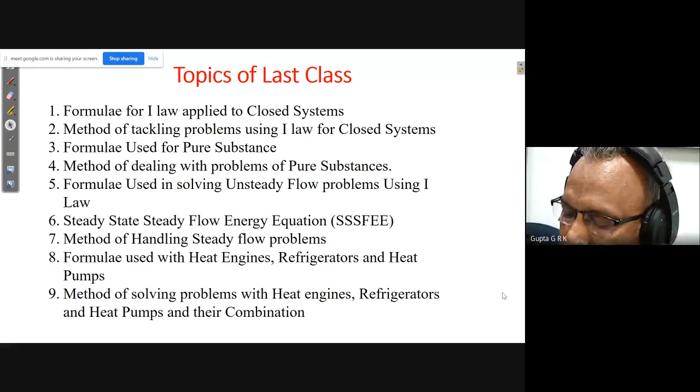So those things we discussed in the last class, and today I am going to do it on the board. We'll discuss today about thermodynamic cycles, which we also call air standard cycles.

All thermodynamics mainly deals with applications in power generation, where we use power cycles, and the other one is refrigeration. These are the main categories thermodynamics works with. Refrigeration will have refrigeration cycles, and heat pumps also use refrigeration cycles only. In power cycles, based on the working substance, we have gas cycles and vapor cycles. If it uses a single phase gas, then we have gas cycles, or two-phase cycles, where part of the processes will have liquid or vapor or a mixture of it. So there are two-phase cycles. Again here also we'll have air cycles and vapor cycles.

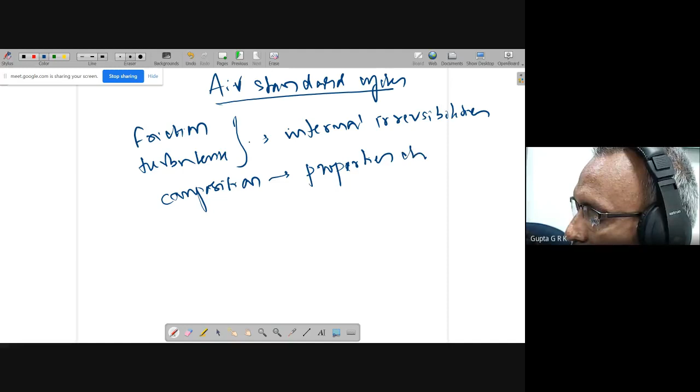So because of that, what are the difficulties? Normally friction or turbulence, which are called internal irreversibilities. And composition normally changes, right? Because the fuel is burnt in the air, so composition changes, its properties change. So it will become difficult. And another thing is like heat losses, there will usually be some heat losses also. All these things make the analysis difficult for the real cycles.

So for that we make some assumptions, and we call them assumptions for the air standard cycle. First we assume that the working fluid is air. And another thing, air is perfect gas. We assume it is perfect gas. Under the ranges of pressures and temperatures, we assume it behaves like perfect gas. Meaning Cp, Cv, R, molecular weight, all are constants. We assume these are constants.

And next, no chemical reactions. Actually there is chemical reaction, burning takes place, but I assume there are no chemical reactions, and the composition of air doesn't change.

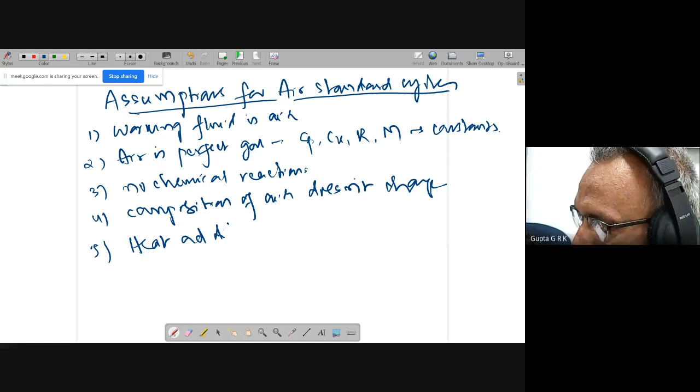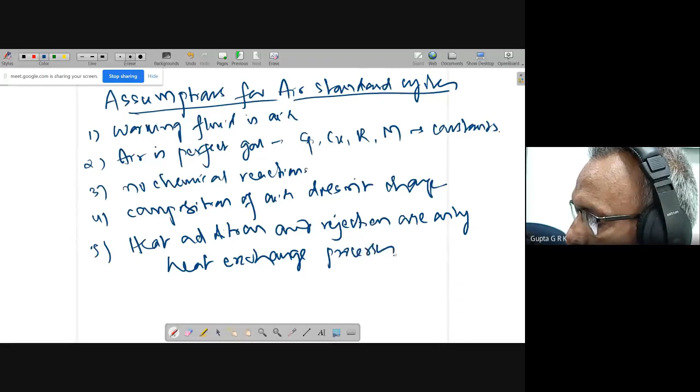So how does the heat addition take place then? So heat addition and the rejection are only heat exchange processes. That is, if I have a combustion chamber like this, where the fuel is there and the air comes here, its composition changes, right? So it is not assumed that this takes place. So we assume there is air going like this, and there will be heat addition through a high temperature reservoir.

Similarly, a heat rejection to a low temperature reservoir, to the atmosphere. So this is the way only heat transfer takes place, not by the burning. So its composition remains unchanged throughout the cycle. So we assume the cycle is a closed cycle. And so this is called an external combustion engine. We assume external combustion, meaning somewhere else the burning takes place, not in the fluid. Okay, this is one particular thing.

It is important to know about the difference between IC engine, internal combustion engine, and external combustion engine. It is not electronics and communication, it is external combustion engine. So here the burning takes place inside the fluid, right? So the composition of the fluid changes. So here it is not like that.

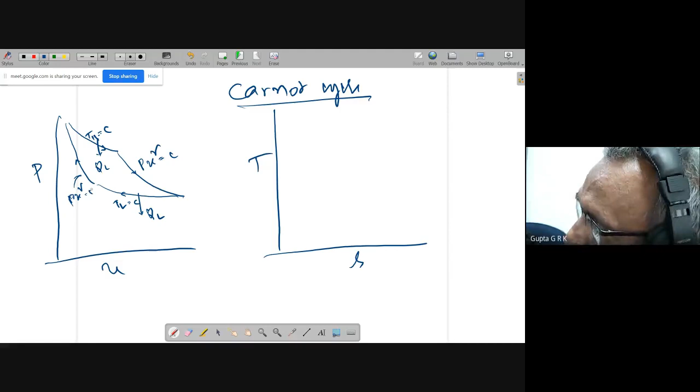This is a reversible isothermal process. Here heat addition takes place and here heat rejection takes place. This is a clockwise cycle, you have to put the cycle direction also. This curve is PV^gamma equal to constant, and this is also PV^gamma equal to constant. So two reversible isothermals and two reversible isentropics. In the TS diagram it becomes very simple, it comes like this.

This is TH equal to constant, this is TL equal to constant. This is point 1, this is 2, this is 3, this is 4. So this is isothermal compression then isentropic compression, and this is isothermal expansion then adiabatic expansion. This is the way the four processes take place.

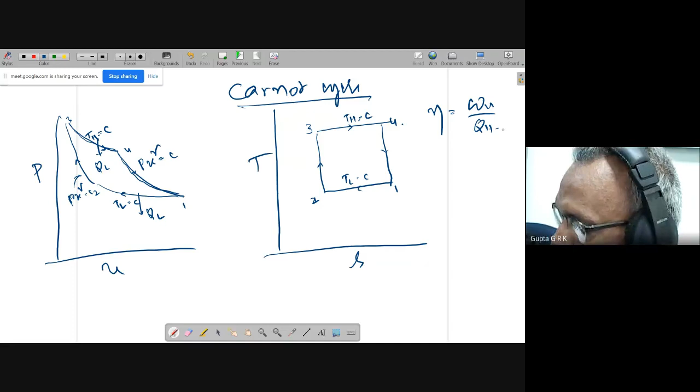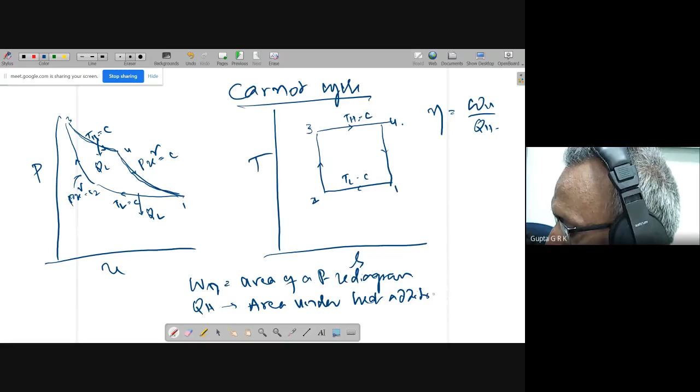If you want to find out the heat transfer, always remember efficiency equals Wn by QH. Wn is the area of the PV diagram. What is QH? It's the area under heat addition in the TS diagram. So this is area under the PV diagram, or area under the TS diagram.

This area gives me Wnet. Here this is heat addition, this is heat rejection. So area under the heat addition curve, the whole thing, this is QH. This gives me Wn, QH, and also efficiency.

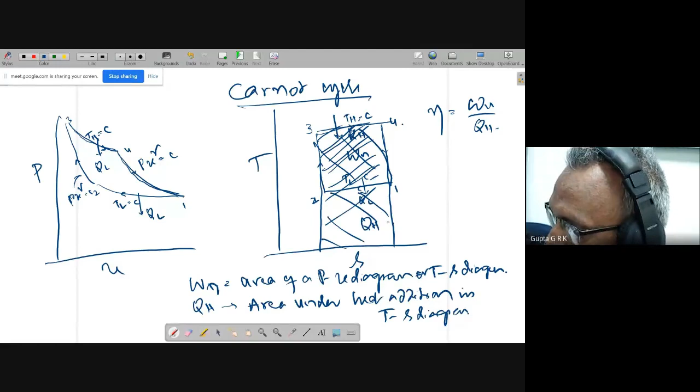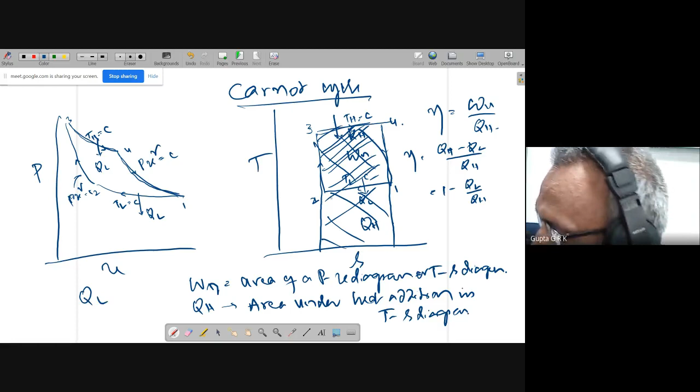If I want to get the expression for efficiency, I'll do it in a simple way. Efficiency equals QH minus QL by QH, that is equal to 1 minus QL by QH. QL is the area under 1-2. Here temperature is constant, TL into S1 minus S2, this is the area under 1-2.

And QH, if you take the rectangle below 3-4, temperature TH into S4 minus S3. So if I write this, it's 1 minus TL into S1 minus S2, by TH into S4 minus S3. S1 minus S2 and S4 minus S3 have the same length, so this cancels, giving 1 minus TL by TH, the Carnot efficiency.

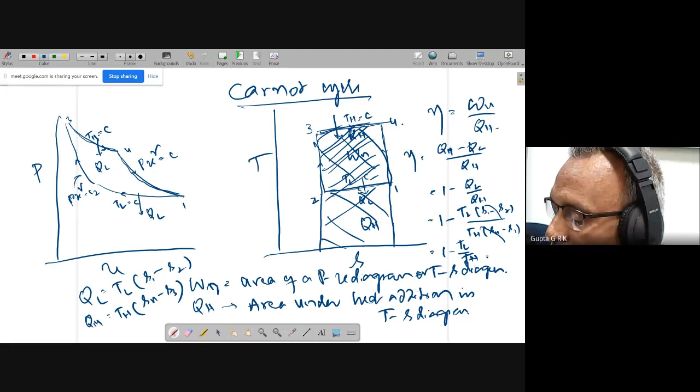You can use the other way also, the way I did previously when solving the Carnot cycle using volume ratios, temperature ratios, and work done. Or simply using entropy, I can get the efficiency like this. So this is the way we get the Carnot efficiency.

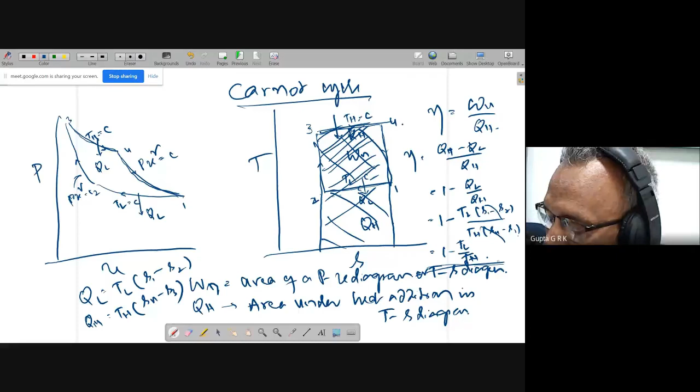Is it okay? Right, thank you. So we'll go to the next one.

So we go to the Otto cycle or diesel cycle. These are actually reciprocating engines. These reciprocating things we have already discussed. We will have a cylinder and a piston moving to and fro.

If this is the piston, there will be some clearance here, this is called the clearance volume, VC. It can go up to some distance, this distance is called VS, the stroke volume or swept volume. The total volume from top to bottom is called the cylinder volume.

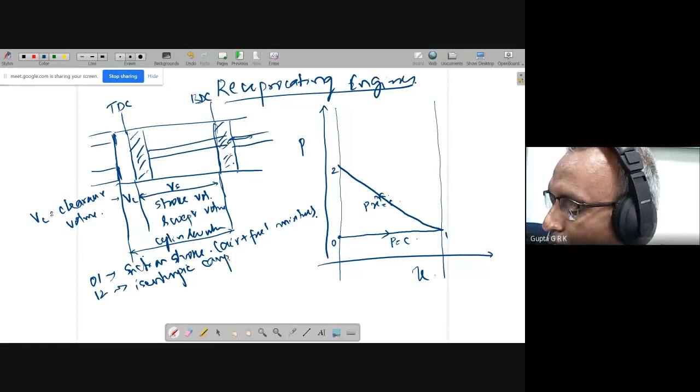So this is 2. So 1 to 2 is isentropic compression. Here both air and fuel mixture is sucked and compressed. When it comes to the top dead center, there will be a spark plug, and there will be burning. There will be a sudden rise in pressure because the mixture is ready for combustion.

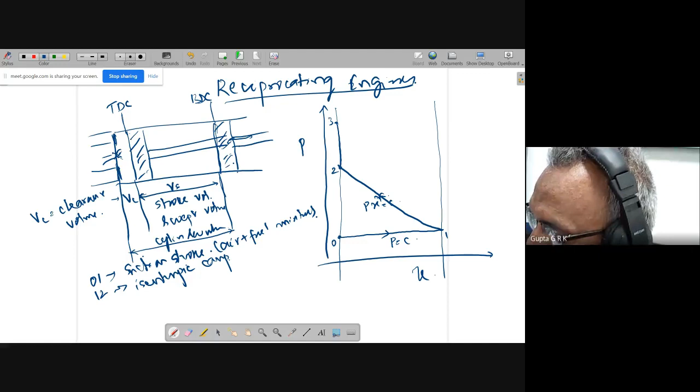It is at high pressure and temperature. So there will be a sudden rise in pressure and temperature, and heat addition here. So 2 to 3 is constant volume heat addition, and then there will be a power stroke or expansion stroke.

It goes like this, this is 4. This is also isentropic, PV power gamma equal to constant. So 3 to 4 is power or expansion stroke. At 4, here during expansion stroke also both valves are closed.

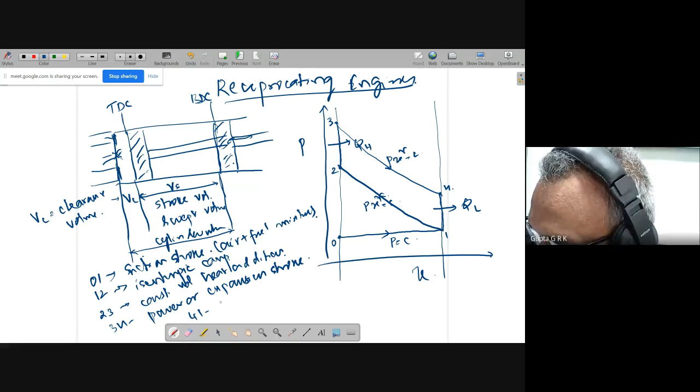So when it starts returning, before starting, because there will be some pressure inside, the exhaust valve opens. At 4, exhaust valve opens because high pressure is inside. Completely all hot gases will go out. This is called heat release, 4 to 1, this is called heat release.

Heat release. So all gases are over, now it can go forward. And when it is going forward, whatever gases are still in the cylinder will be pushed off. This is called the exhaust stroke, it just retraces, so 1 to 0, this is called the exhaust stroke.

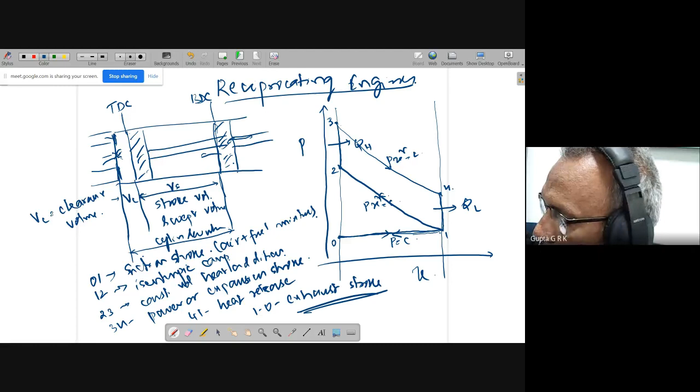This is the way the cycle completes. Again it starts from 0 to 1, it sucks, then compresses, then combustion, then power stroke, and release, and exhaust stroke. So you should not think that 1, 2, 3, 4 are the 4 strokes. No, when it is going from top dead center to bottom dead center, that is 1 stroke, bottom dead center to top dead center is another stroke. Like that, 4 strokes for 2 revolutions.

So this is 0 to 1 suction stroke, 1 to 2 compression stroke, 2 to 3 heat addition at constant volume, 3 to 4 expansion stroke or power stroke, again isentropic, and 4 to 1 it is heat release. Piston is not moving, piston is there only, we opened the exhaust valve. So this is exhaust valve opening, here 0 is inlet valve opens, and here both valves are closed, inlet valve closed, exhaust valve closed.

So this is the way the whole cycle takes place. Is the cycle okay? Yes, sir. Okay, so we will see the thermodynamics part of it.

So I have to draw this again, both PV and TS diagrams. So actually, when you draw it, normally in many books this line will not be drawn because there is no area. It just goes like this and comes like this, positive and negative area cancel out, so there is no area included, zero area. That's why many times it will not be drawn. And this is QH, and this is QL.

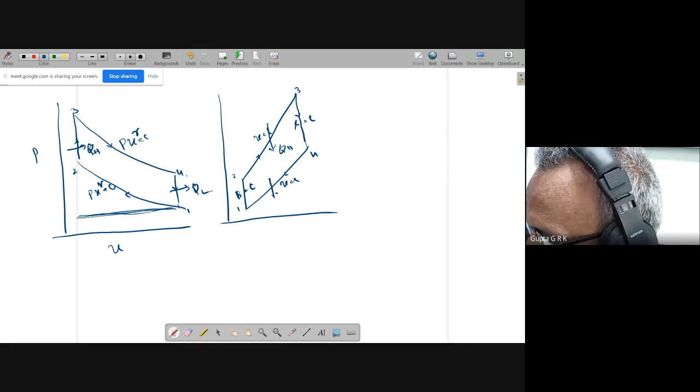So heat addition is here, QH, and heat rejection is here, QL. This is the way both cycles will be, this is T. When you draw the figures, you have to show everything. For PV, you have to show both axes, and put the arrows. Draw the cycle and show the arrows in clockwise direction, put the numbers properly, and show each process, heat addition, heat rejection, everything, so that it completes the cycle.

So if I want the efficiency, efficiency is equal to 1 minus QL by QH. What is QL? QL is a constant volume process. If I take delta Q equal to du plus delta W, delta W is 0. So here Q41 is equal to CV into T4 minus T1, because du is CV dt, CV into T4 minus T1. So I will write CV into T4 minus T1.

When you come to QH, that is 2 to 3. Again it is constant volume, delta W is 0. So Q23 is equal to CV into T3 minus T2. CV goes off, so I will get the expression like this.

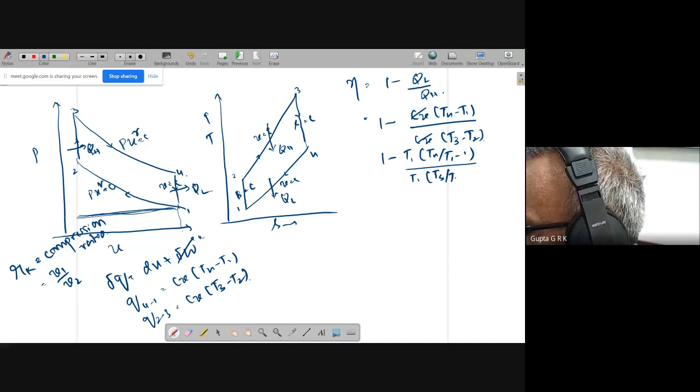I want to express this in terms of RK. For convenience, for all the cycles I follow this particular procedure. I take T1 common here: 1 minus T1 into T4 by T1, minus 1 by T1 into T3 by T1, minus T2 by T1. So what is each?

If I take T2 by T1, since this is an isentropic process, it is equal to V1 by V2 to the power of gamma minus 1, or Rk to the power of gamma minus 1. Now come to T3 by T2.

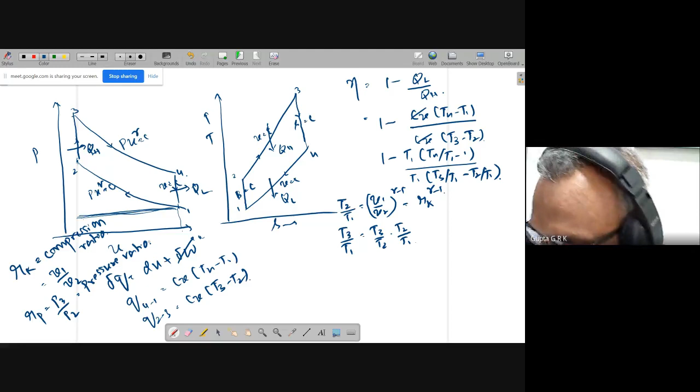T3 by T1 is T3 by T2 into T2 by T1. T3 by T2, going from low pressure to high pressure for a constant volume process, I can take as pressure ratio, Rp is equal to T3 by T2, which is pressure ratio. So P3 by P2, because for a constant volume process, P3 by P2 is T3 by T2. So I can write this as Rp into T2 by T1, which I already know is Rk to the power of gamma minus 1.

Then coming to T4 by T1, I will write it as T4 by T3 into T3 by T1. V1 by V2 is also equal to V4 by V3, because V1 equal to V4 and V2 equal to V3. So T4 by T3, since 3,4 is an isentropic relation, is V3 by V4 to the power of gamma minus 1, into T3 by T1. And V3 by V4 is again 1 by Rk to the power of gamma minus 1, and T3 by T1 is this, V4 by V3, here V3 by V4.

This is 1 by Rk to the power of gamma minus 1, into T3 by T1, which is Rp, Rk to the power of gamma minus 1. So Rk power gamma minus 1 cancels with Rk power gamma minus 1, and this will be Rp only. This is the way we get it.

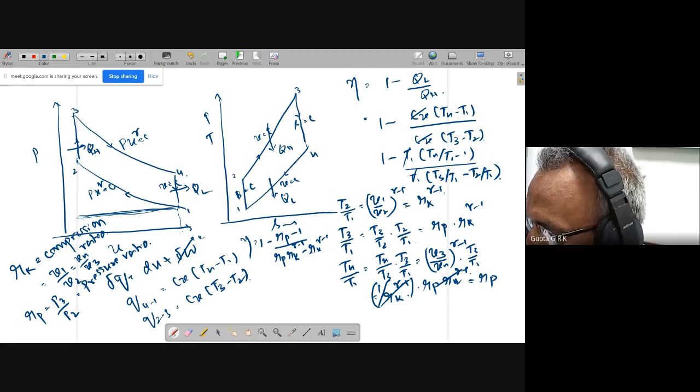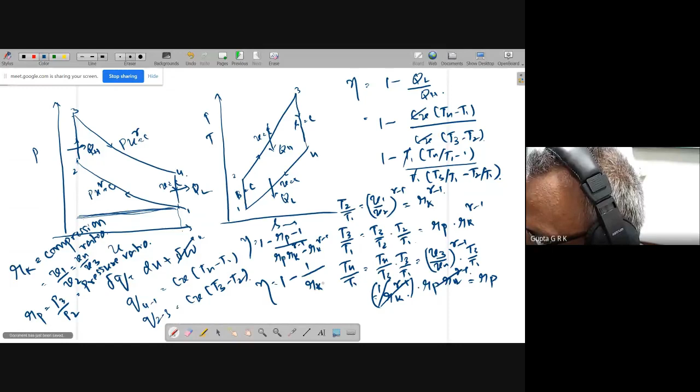In the denominator, if I take Rk power gamma minus 1 common, I will get Rp minus 1, and Rp minus 1, Rp minus 1 cancels off. So I will get 1 minus 1 by Rk to the power of gamma minus 1. This is how I get the expression. If you remember the Brayton cycle, I will get 1 minus 1 by R to the power of gamma minus 1 by gamma, where that R is pressure ratio.

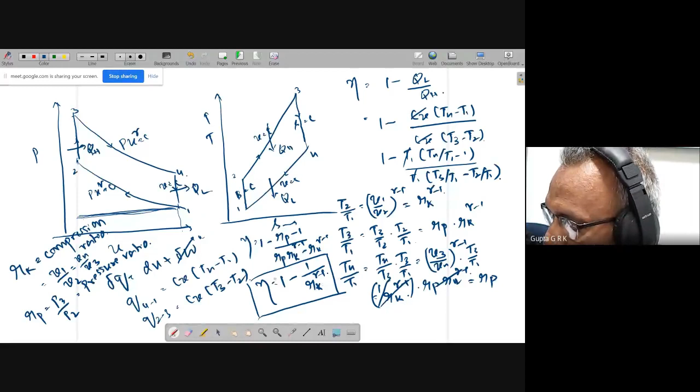Here this R is compression ratio, Rk is compression ratio. This is the way I get eta. So eta is equal to 1 minus 1 by Rk to the power of gamma minus 1. This means it is a function of Rk and gamma.

So if I draw the variation of efficiency with Rk, when Rk is equal to 1, efficiency will become 0. As Rk increases, this denominator will increase, and 1 by this will decrease, so 1 minus this will increase. So eta increases with Rk. As Rk increases, efficiency increases. So it comes like this.

It is also a function of gamma. If you calculate it for different values of gamma, you'll get something like this. As gamma increases, I'll get different lines like this. Suppose gamma equal to 1.2, gamma equal to 1.3, gamma equal to 1.4, gamma equal to 1.66. Gamma equal to 1.3 is CO2, gamma equal to 1.2 is like alcohol or ethane, gamma equal to 1.4 is air, and gamma equal to 1.66 is helium. So for different fluids of different gamma, as gamma increases, it is found that efficiency increases. This is the way we analyze this cycle.

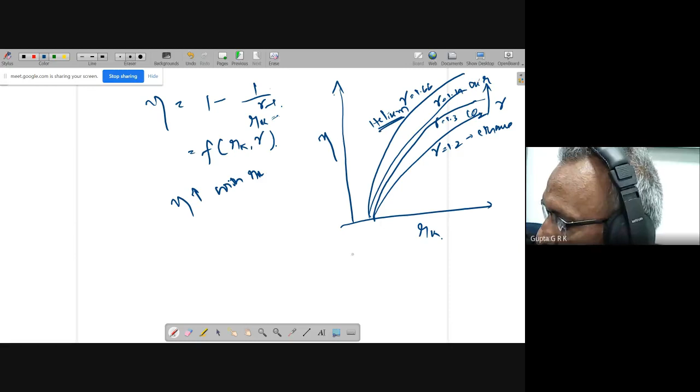I told you efficiency increases as Rk increases, right? So I want to have high compression ratios. But the problem is when I have a high compression ratio, as it is moving forward, because a mixture is getting compressed, two things may happen. One is, if the mixture temperature during compression becomes very high due to a large compression ratio...

The temperatures will be very high, and before giving the spark, the burning may take place before completion of the compression stroke. So if suppose it burns here itself, it cannot go to the end — it pushes it back, and I lose all the power. So this is one problem that may happen.

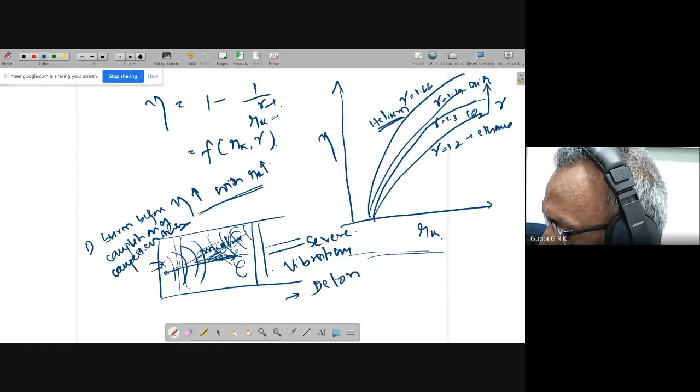Another thing is, after giving the spark, when it is going back, the flame front will be moving like this. Because of high temperature, there may be another burning here where the flame front comes and they interact, and there will be severe vibrations and a lot of noise. This is called detonation, sometimes also called knocking.

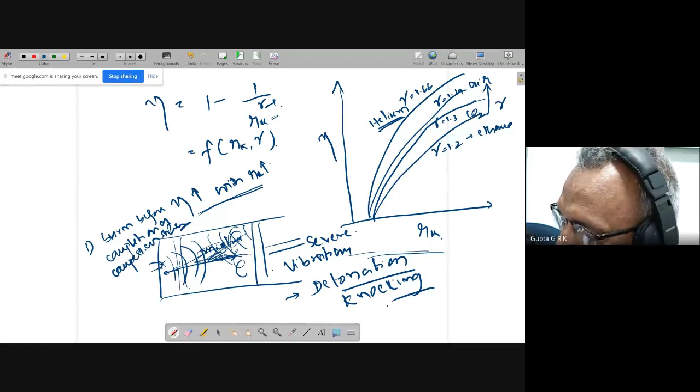So knocking or detonation takes place because of high compression ratios. Because I want to increase efficiency, I cannot just increase the compression ratio as much as I want — it is restricted by detonation and knocking.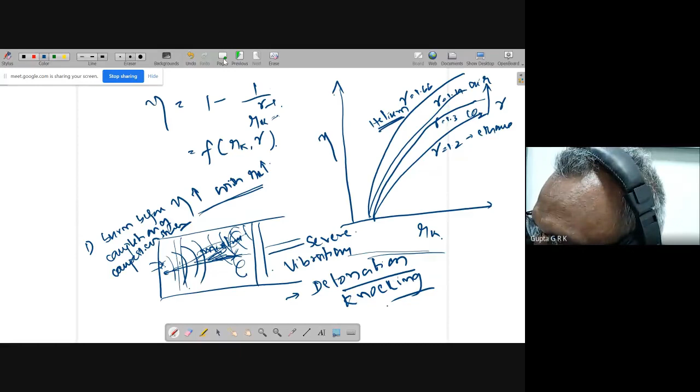So people used to add what is called tetraethyl lead to the petrol, which increases the auto ignition temperature — that is, it can only burn at high temperature. So it can increase the compression ratio some more so that it won't burn by itself. This is called auto ignition: burning by itself without giving a spark. If auto ignition temperature is high, the probability of knocking is less.

But later it was found that this lead in the petrol burns and comes out as lead oxides, which harms the environment and humans, because it is highly toxic and creates large pollution. That's why nowadays people have restricted using lead, and we have to use what is called unleaded petrol. In petrol pumps, you will now find unleaded petrol available. So we have to use unleaded petrol.

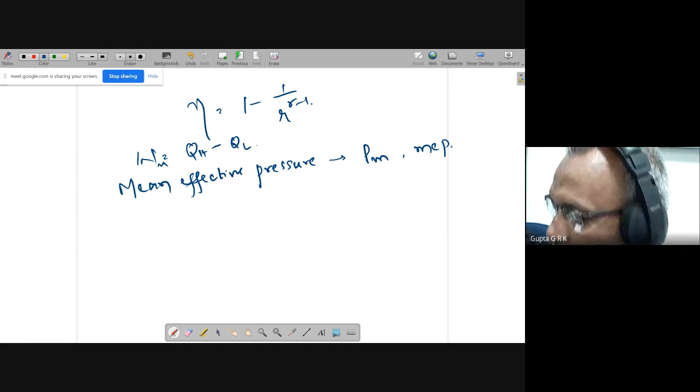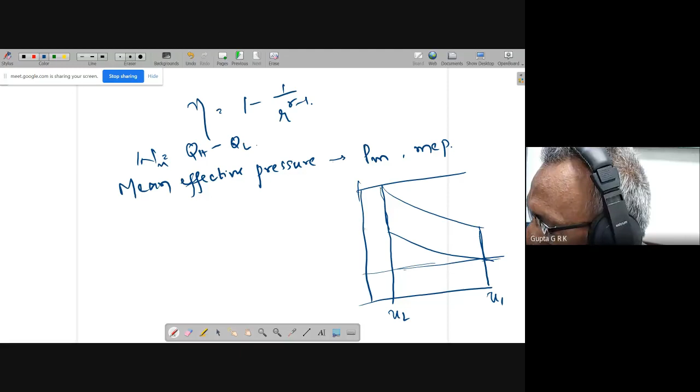We call it PM or MEP. Mean effective pressure means, suppose if I have a cycle working like this, this is the minimum pressure and this is the maximum pressure in which it is working, and this is V1 minus V2, this is V1, and this is V2. So there is a mean pressure here, such that this area is equal to the cycle area.

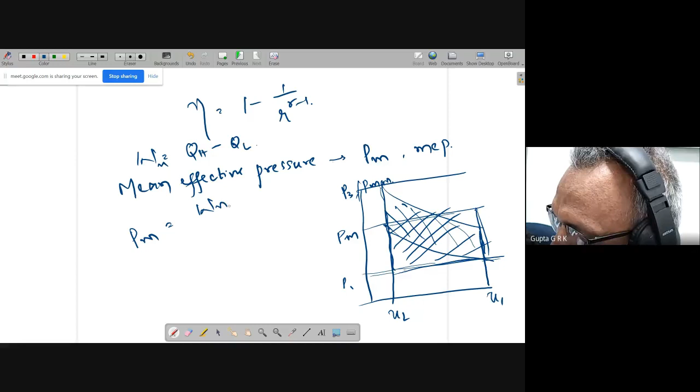That area should be equal to W net, the net work. So that pressure is called PM. This is P1 and this is P3 or P max, called the maximum pressure, P1 is the minimum pressure, and this is the mean pressure. So mean effective pressure PM is equal to W net by V1 minus V2. The area equals PM into V1 minus V2, which is W net, so mean effective pressure is W net by V1 minus V2.

Okay, this is the way the mean effective pressure is defined. So if you want to solve a problem... yes, go back to the previous one. Tell me.

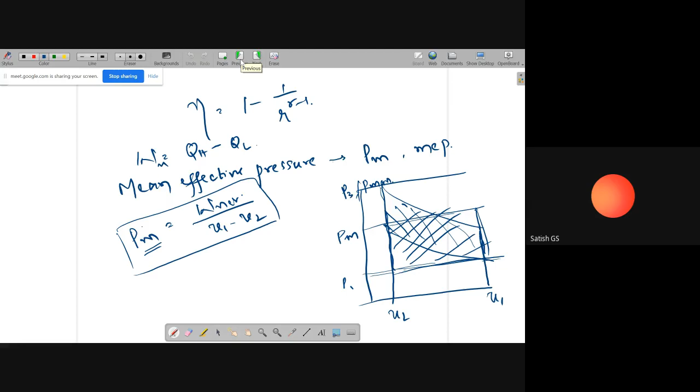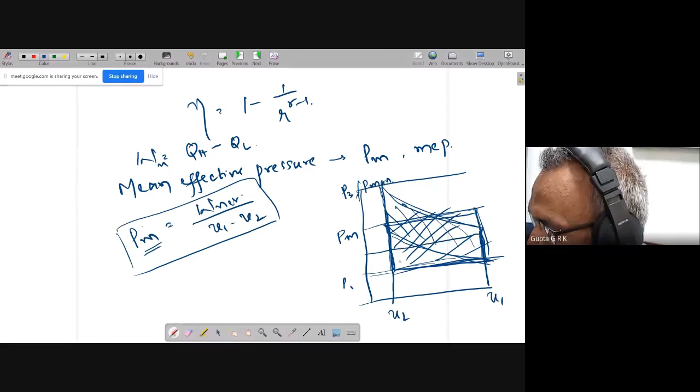Sir, PM equal to P1 plus... No, this area, it is actually this area. This is W net, right? Cycle area, this should be equal to this area. So if this area is equal to... sorry, this is P1 plus W. Actually, maybe it may not be like that. I think maybe here, above this. Okay, maybe this is PM.

It's not average of that or anything. Mean effective pressure means the average pressure that is acting on the cylinder to give the same work.

I think it's okay, previous one: PM into V1 minus V2. This area, okay, so this is PM. This area should be equal to W net. So V1 minus V2 is same, and this height of the rectangle is the mean effective pressure.

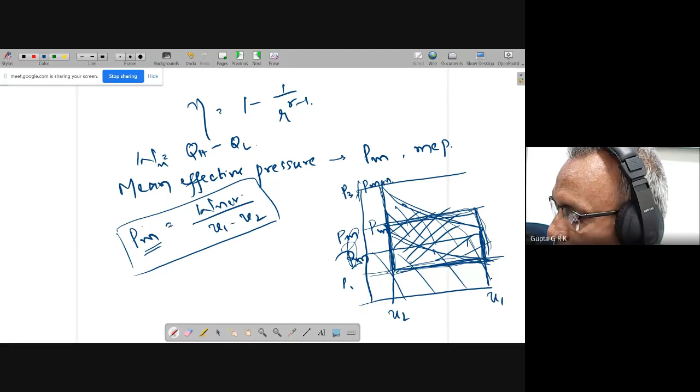It is only this height. This height is PM, okay, not on the axis. Not on the axis. Okay, this difference is PM, mean effective pressure. Is it okay?

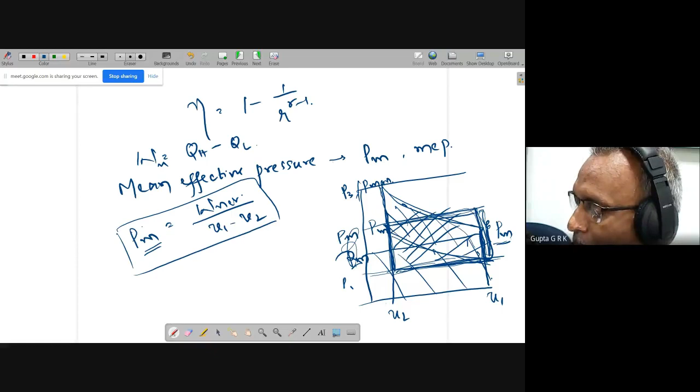Yes sir. So this area of the Otto cycle is replaced by a rectangle with the same V1 minus V2 width. So the height of the rectangle is mean effective pressure. Is that okay?

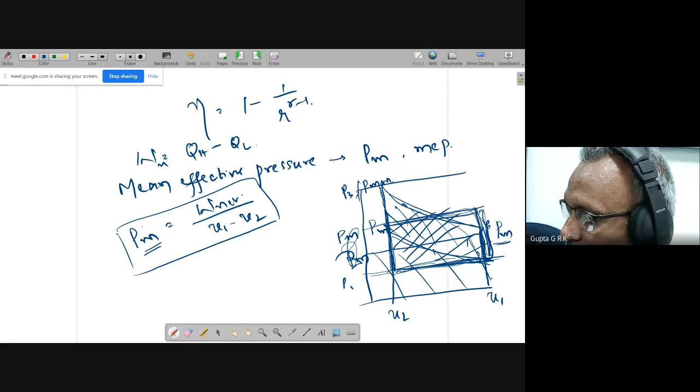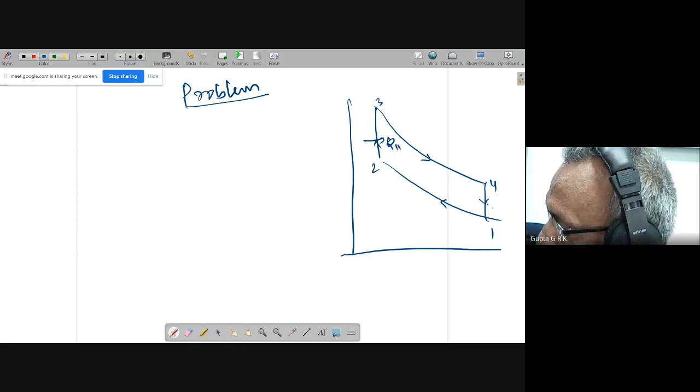Okay, we will see the problem. So usually you will be given P1 and T1. Okay, so I always told, many times in the problem you will be asked to find out all the properties at the salient points. So that is 1, 2, 3, 4.

You have to get P, V, T, right? So whether it is useful or not for the calculation of efficiency, forget about it. You have to know about finding out P, V, T at all the points. Okay, so P1, T1 will be given to you.

So by which you can calculate V1. V1 is equal to RT1 by P1. R is equal to 0.287 kilojoule per kg Kelvin, and P1 in kilopascals, and T1 in Kelvin. And so V1 you will get in meter cube per kg. Okay, so state 1 is over.

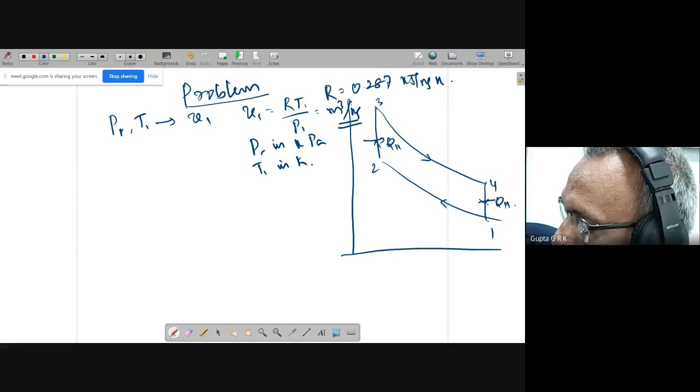When you want to go to state 2, I know the process PV power gamma equal to constant, and I have to be given some variable. Okay, so that variable is Rk. You will be given Rk, which is V1 by V2. Okay, so this gives me V2.

This gives me V2, and I have to get T2 and P2 from the process relations. So I know that T2 by T1 is equal to V1 by V2 to the power of gamma minus 1. This gives me T2, and P2 by P1 is equal to V1 by V2 to the power of gamma. So this gives me P2.

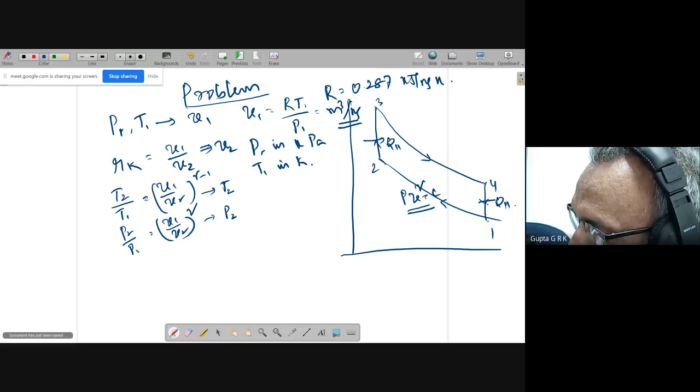Okay, in that way P2, V2, T2 are obtained. And next I have to get point 3, that is 2 to 3. I know that V equal to constant means V2 equal to V3. And some other data I need.

So usually the data will be given in different ways. You may be given the maximum temperature developed in the cycle, or maximum pressure developed in the cycle, or you may be given this much of heat is added. Okay, QH will be given.

So if T3 or P3 is straightly given, it's no problem. And QH we know, QH is equal to CV into T3 minus T2, right? And CV is equal to 0.718 kilojoule per kg Kelvin, right? So this gives me T3.

So T3 may be directly given, or you have to calculate T3 like this. And once you get T3, V3 is already known. So P3 by T2... sorry, because P3 V3 by T3 is equal to P2 V2 by T2. So because V2 equal to V3 constant, P3 by P2 is equal to T3 by T2. This gives me P3. Okay, in that way, point 3 is over.

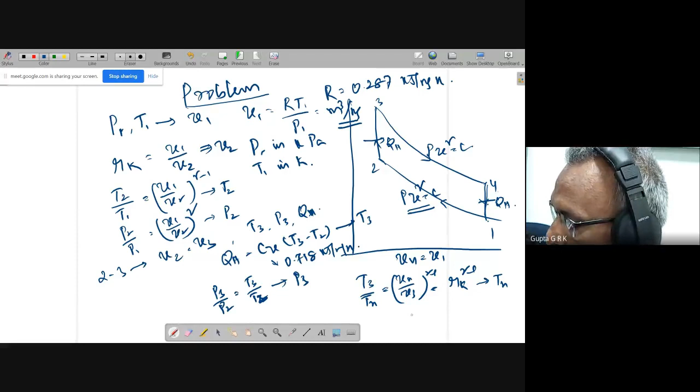Okay, so like this, I can find out all the properties at all the points. Once you know, you can find out QH, QL, W net and all. Anything, any difficulty here?

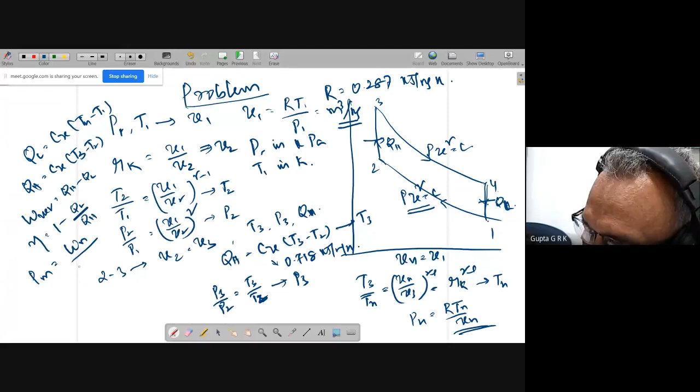So QL is equal to CV into T4 minus T1. QH is equal to CV into T3 minus T2. And W net is equal to QH minus QL, and eta equals 1 minus QL by QH. PM, mean effective pressure, is W net by V1 minus V2. So in this way you can find out all the values whatever you are asked for. Is that okay?

So this is about the Otto cycle. Now coming to the diesel cycle. People want to have more efficiency, but petrol gives some problem, because whenever the mixture goes in, it is ready to burn whenever high temperature is there. So I don't want that. I want high pressure ratios so that I can have higher efficiency. So people thought of sending only air into the cylinder, and after compression, they want to send the fuel into the cylinder. So here they came up with the diesel cycle, and this is called the CI engine.

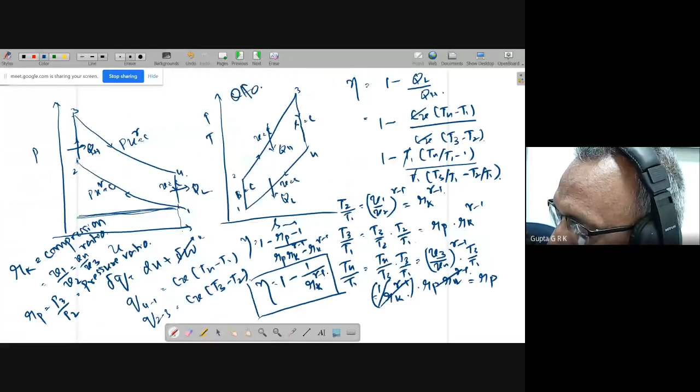And if you go to the Otto cycle, this is Otto cycle, this is SI engine, spark ignition engine. This is CI engine, compression ignition. The Otto cycle or petrol engine needs a carburetor to mix air and fuel, and it needs a spark plug for spark or ignition.

And in the diesel cycle, where I have a diesel engine, I don't need a carburetor and spark plug. I need an injector to inject the fuel into the cylinder, after the compression, because after compression the pressure inside is very high, and I have to push the fuel in with very high pressure. Then only it can go into the cylinder. So for that I need a fuel pump to increase the pressure of the fuel. Okay, so in this way it happens.

So when you have the cycle, again this is the clearance volume and this is the total cylinder volume. It starts from 0, sucks air from 0 to 1, suction stroke, then there is the compression stroke, and this is PV power gamma equal to constant. So at 2, I am injecting the fuel. Then the burning starts. It is not sudden, it takes some time. So it starts injecting the fuel, and the burning takes place.

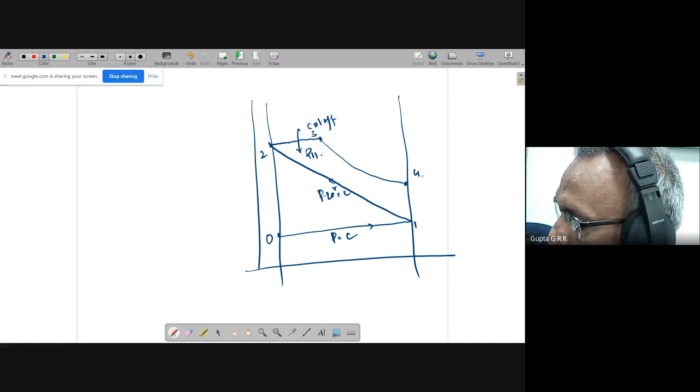When the burning takes place, it tries to increase the pressure, but at the same time the piston is going back, so the pressure decreases. In that way, pressure is maintained constant up to a certain point, up to where the fuel is injected. This is what is called the cutoff. Fuel is injected from 2 to 3, where burning takes place and heat is added. After that, the fuel is stopped. Now expansion takes place like this, up to 4, then I open the exhaust valve and this happens. This is QL release. So this is the way, and this is PV power gamma equal to constant.

Same thing: 0 to 1 suction, 1 to 2 compression, 2 to 3 combustion, which is isobaric, constant pressure combustion, and 3 to 4 expansion, and 4 to 1 release, and 1 to 0 exhaust. So this is the way the cycle happens.

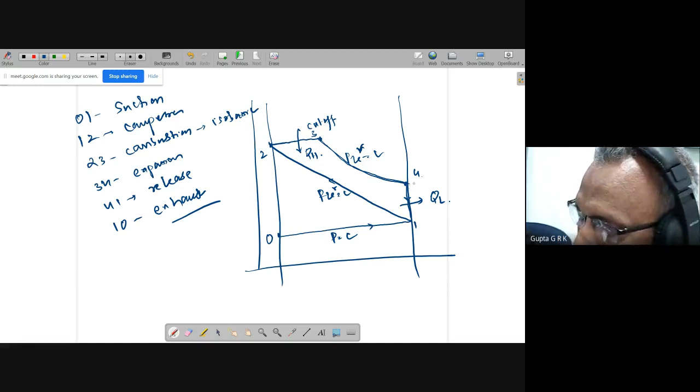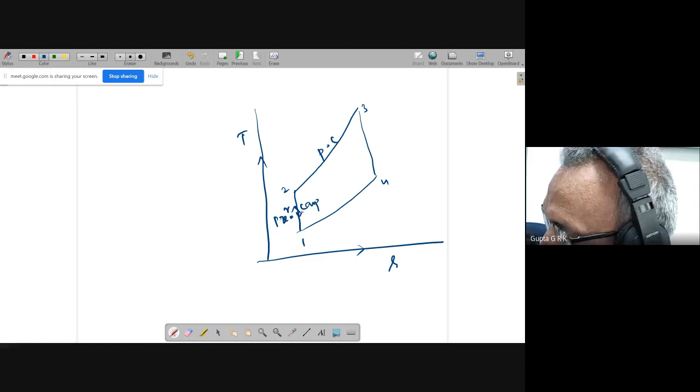And when you come to the TS diagram, previously whatever is there, it will be like that only. Only thing is, this is 1 to 2 compression, 2 to 3 where P equal to constant -- this is PV power gamma equal to constant -- and here heat is added. Then 3 to 4 is the expansion, also PV power gamma equal to constant. And 4 to 1 is the release or heat loss. So this is the way the cycle happens.

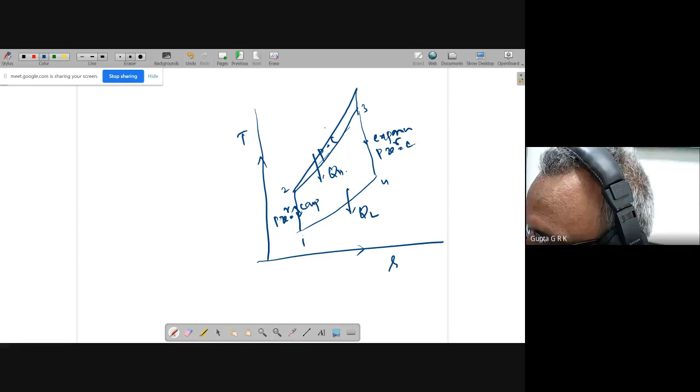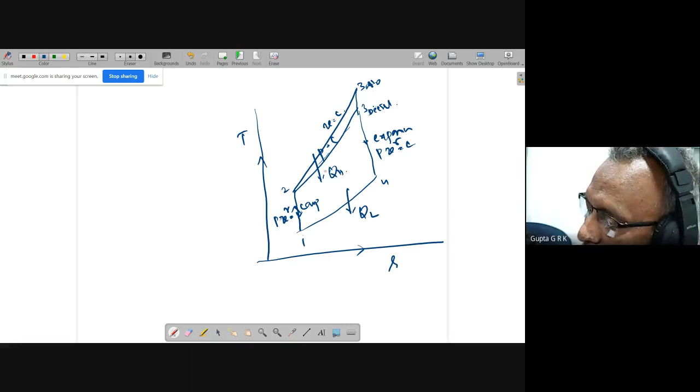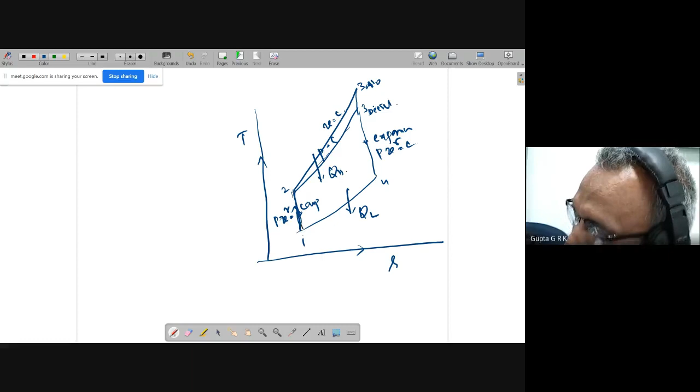So if you compare the Otto cycle and diesel cycle, these three processes, that is 1-2, 3-4, and 4-1, are the same. Only combustion is different. Here I have P equal to constant, and for the Otto cycle, V equal to constant will be there. V equal to constant is steeper -- isochore is steeper on a TS diagram than isobar. So it will be like this: this is 3 Otto, this is 3 diesel. If you see from the cycles, because all the bottom three are same, only the top one is different, you can see that the Otto cycle has more area. That's why the Otto cycle is more efficient compared to the diesel cycle for a given compression ratio. If the compression ratio is the same, then the Otto cycle is more efficient. The other things we will see later.